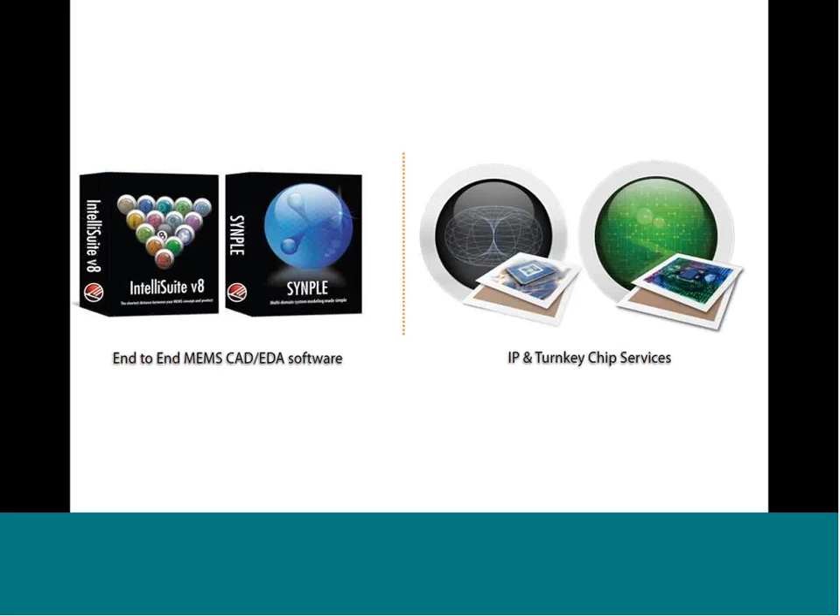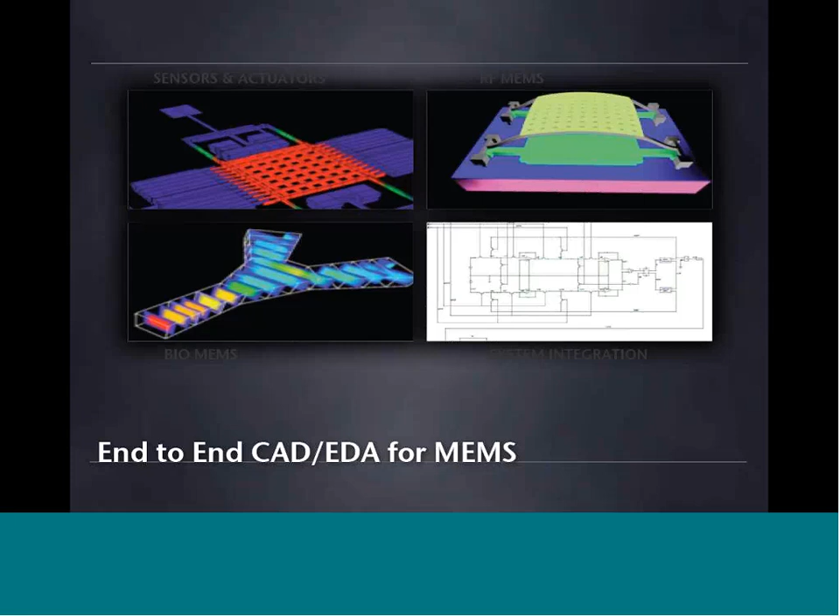So as I mentioned, we have the MEMS software and also the fabrication and design services. Within the software tools, we have a large suite called Intellisuite, and this suite includes anything from process simulation, which we're going to talk about today, to more system-level simulation, microfluidic simulation, thermo, electromechanical, multiphysics analysis, layout, and a few other tools as well.

As far as development of hardware devices ourselves, we've done a lot of work developing our own devices, as well as design and fabrication services for other customers, universities, and companies that we partner with.

Our operations are headquartered in Boston. That's where our main location is, and we also have a large facility in Nanjing, China, which currently includes about a 50,000 square foot R&D facility with a clean room. This is where we do a lot of work ourselves making sure our simulation tools are benchmarked and accurate.

We've really put a lot of effort into ensuring that the simulation tool, specifically the wet etch simulation tool, is the most accurate simulator possible.

Today we have customers in over 30 countries all around the world, from Europe to Asia to North America. Some of our customers include some of the largest companies around the world working on MEMS, as well as a large amount of academic partnerships.

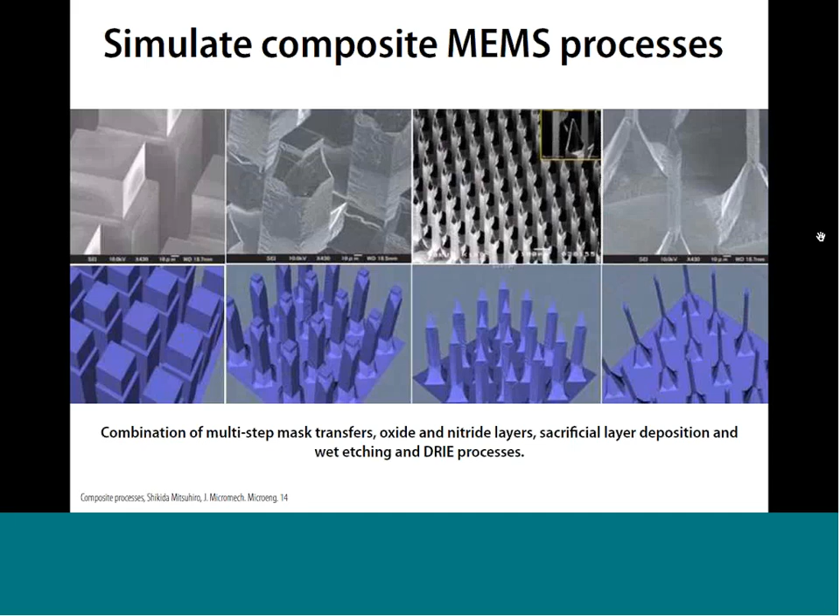As you see here, this is a comparison between actual microneedle array fabrication on top and some simulations within IntelliEtch on the bottom. This is a 4-step process with 4 different masks, having a separate etch between each mask step. So for simple etching simulations, as well as complex simulations like this with multiple steps and different combinations of processes, IntelliEtch is really powerful.

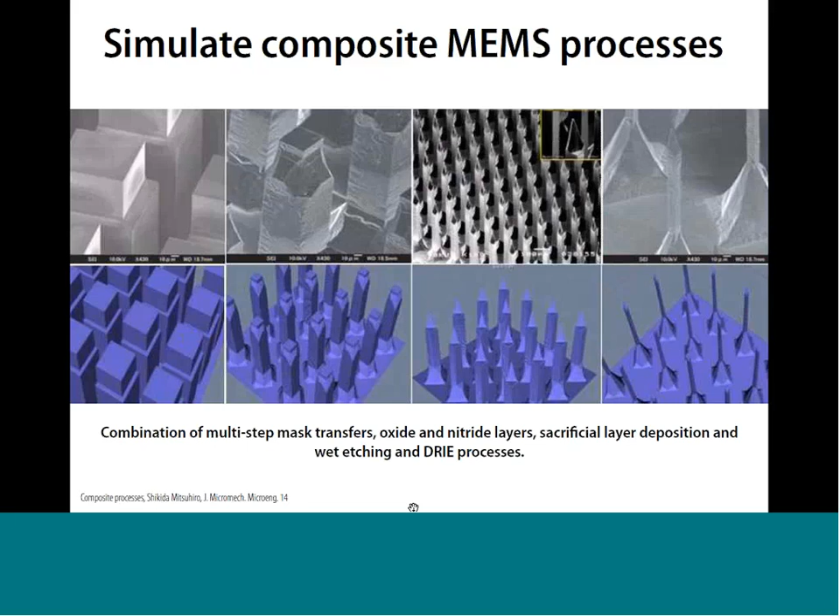As I mentioned, we've really validated the simulator, spent a lot of effort benchmarking it. You'll see here some of the different experiments that we've done to compare the simulation results to the results in our own clean room.

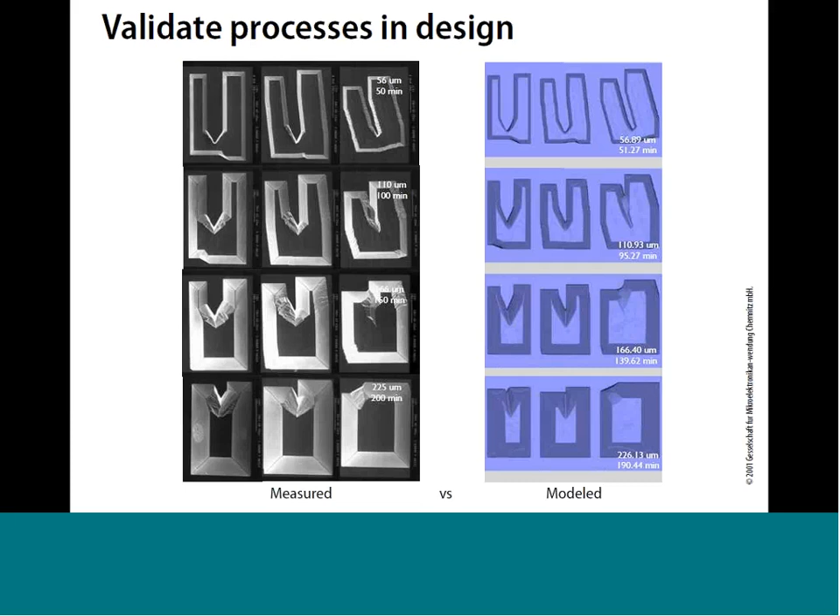One other advantage of IntelliEtch that really sets it apart from other tools is the capability to do higher order plane etching. So as opposed to simply being limited to some of the standard silicon wafer orientations, in IntelliEtch you really have the freedom to etch whatever higher order plane you'd like to, and this really opens up a lot of possibilities.

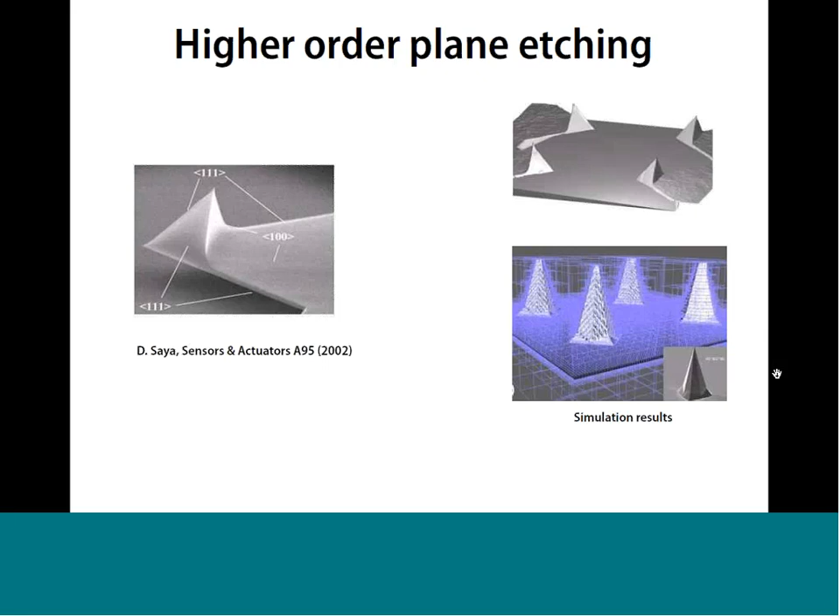Probably the best way for you guys to really get an idea of what IntelliEtch is about is for us to take a look at the software itself directly. So you'll see here I have the IntelliEtch program open. What I want to do now is just take you through a simple example of how to use the program, just so you get an idea of how the software is used and maybe get some ideas on how it could be helpful for you in your research and teaching.

So to start out, when we're using the program, we're going to be defining a certain silicon wafer. As I mentioned, we have these predefined surfaces here. So if you're using just a standard 100, 110, 111 wafer orientation, you can select those. Or if you want to do a more advanced surface and etch a higher order plane, you can simply input the orientation of the wafer using the Miller indices in these boxes here, the H, K, L Miller indices, and it'll generate a wafer of that orientation for you.

And we do have the capability to etch quartz as well. Most researchers are doing silicon etching, so that's mainly what the program is used for. But it is possible to do anisotropic etching on quartz, and we're also adding capabilities for other materials as well.

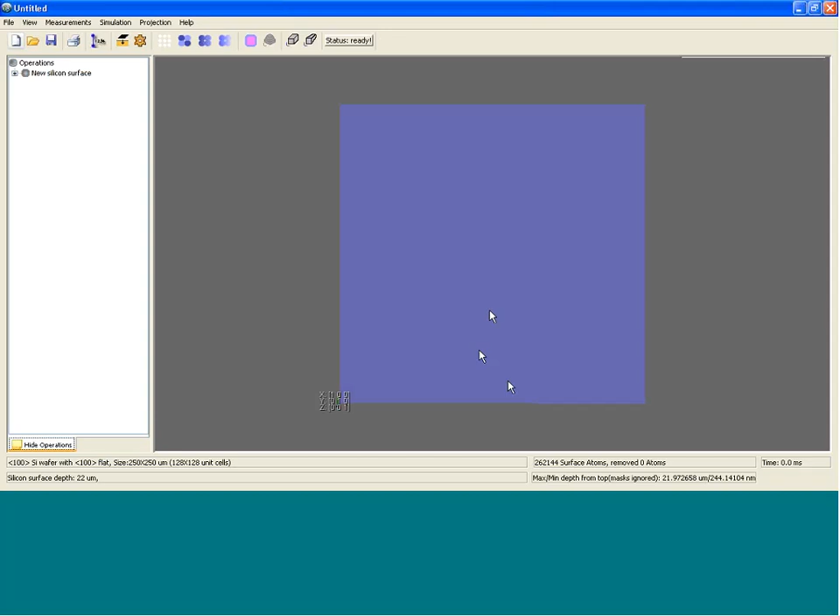So you'll see then that we have this wafer generated with our desired orientation. The next step is going to be to apply a mask onto the wafer before we do any etching on it. Now, the way that you would apply a mask in the program, the first step is that you would need to import your mask file from whatever layout program you're using, and import it so that you can use it within IntelliEtch.

So to show you how to do that, I'm just going to open up our layout editor for a few minutes. This is our layout editor called Blueprint. Blueprint is automatically included with IntelliEtch because it's needed in order to import the mask files from other programs. Or if you'd like, you can simply draw your mask layout within Blueprint here. But in many cases, people might be importing, say, a GDS file or a DXF file, and that's very easy to do. All you need to do is select your GDS file and open it up within Blueprint.

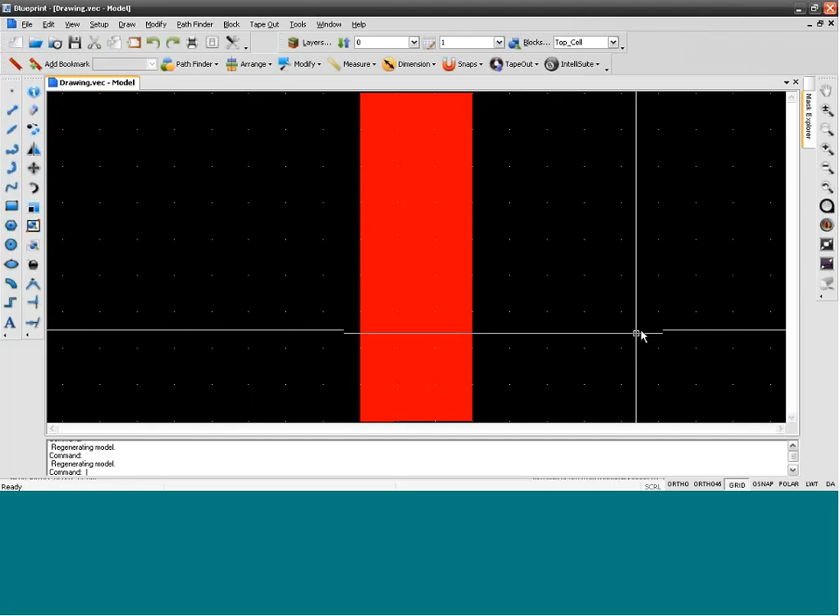So you'll see this is just a simple square mask layout. Once you open up your GDS file or your DXF file, in the case that you wanted to import it from another program like LEdit or AutoCAD or something, then all you need to do is export it into our IntelliSuite format.

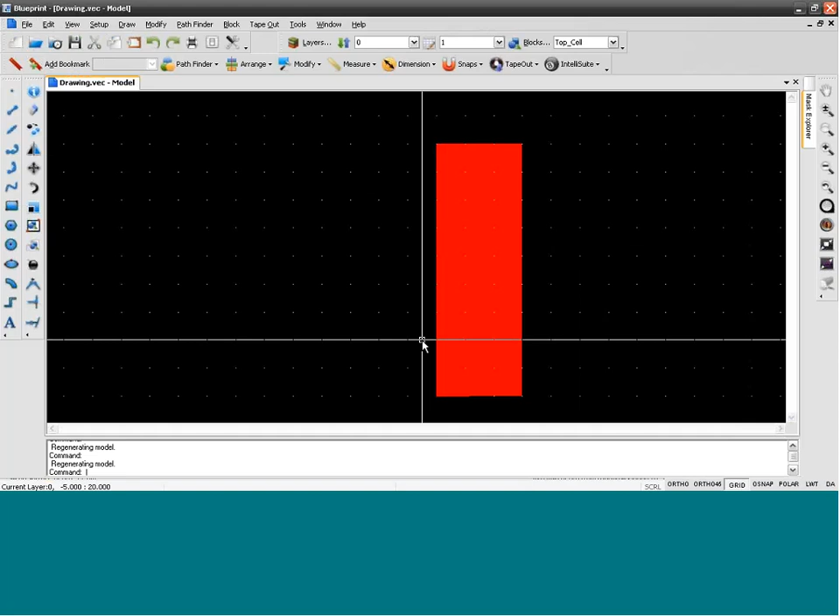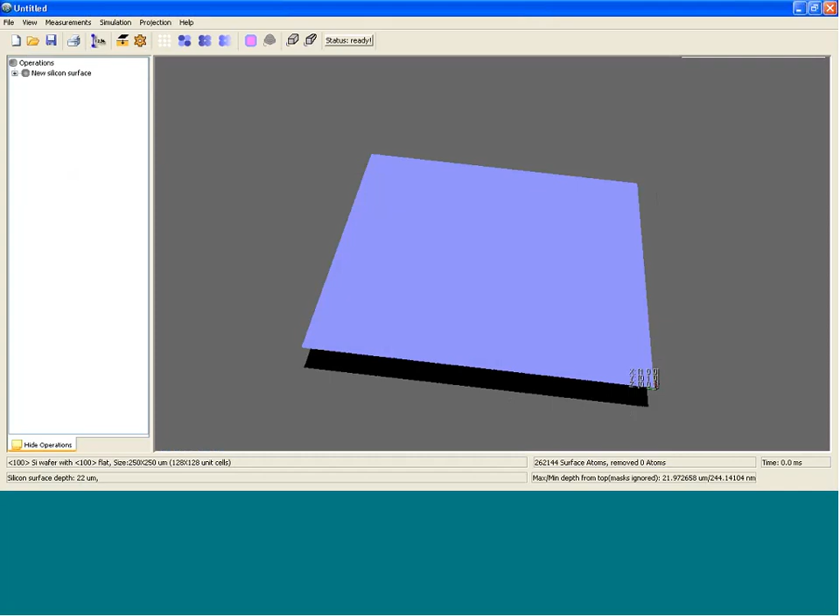Save that mask file, and then it'll be ready to use within IntelliEtch. So if we go back into IntelliEtch, once we have that mask file imported and saved in our IntelliSuite format, we can apply it on the wafer here. We would select the file that we want to use. In this case, we also have the possibility to use bitmap files as well. So we would select our mask file, and then we've got it ready to be applied on the wafer here.

Depending on if you want it to be a negative or a positive mask, you can flip that back and forth as far as exactly whether you want it to be negative or positive.

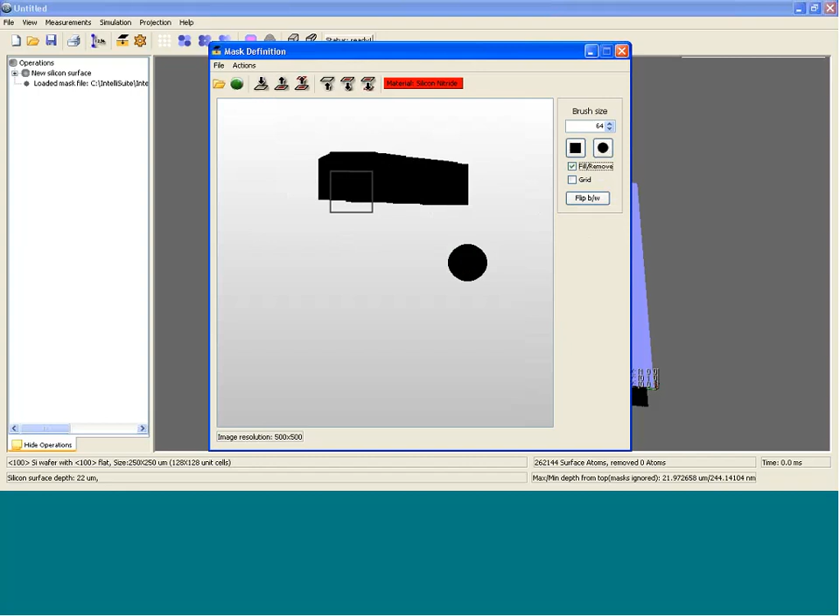If you really wanted to, you could actually use these drawing tools, and you could draw right within this mask window. So you could just draw some shapes quickly, different shapes, which is obviously a little bit less accurate. In most cases, you're probably just going to want to be importing your mask file. But we can just take that away as well.

And then you're going to be applying it on your wafer. Now we have two different options for applying the mask on the wafer. In this case, we're going to just keep it as being defined as silicon nitride. But you can choose between silicon nitride or silicon oxide as well. The materials don't really have any difference in the simulation—they're both going to be considered as just a hard mask.

So within the etching simulation, the actual mask material is not going to be etched away at all. It's just going to be considered a hard mask. But having the option to define the two different materials will allow us to apply different masks on top of each other, which we're going to do in just a minute, so you'll get a better idea of how that might work.

But in this case, we have our mask, so we're going to apply it on the top of the wafer. We're just going to click this button to apply it on the top of the wafer. So you'll see that little circle is going to be applied on the wafer, and you can see it in red there.

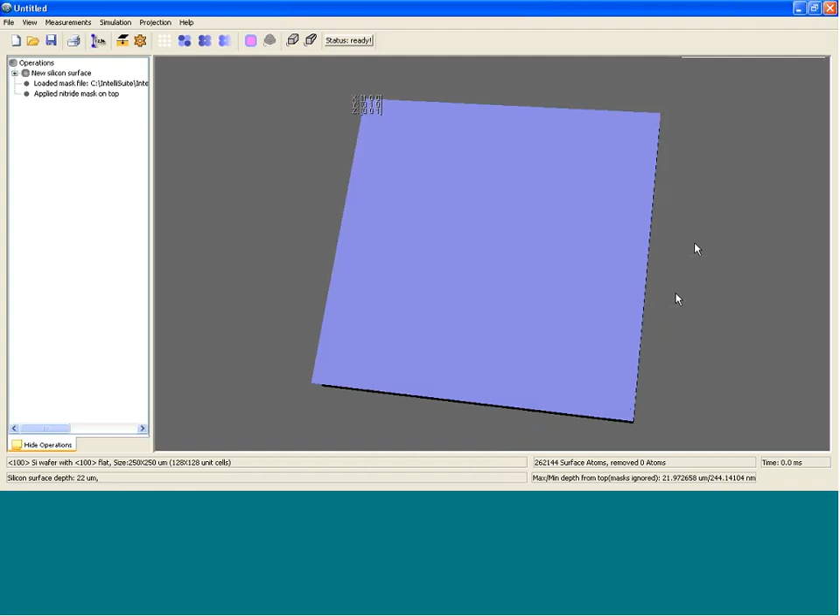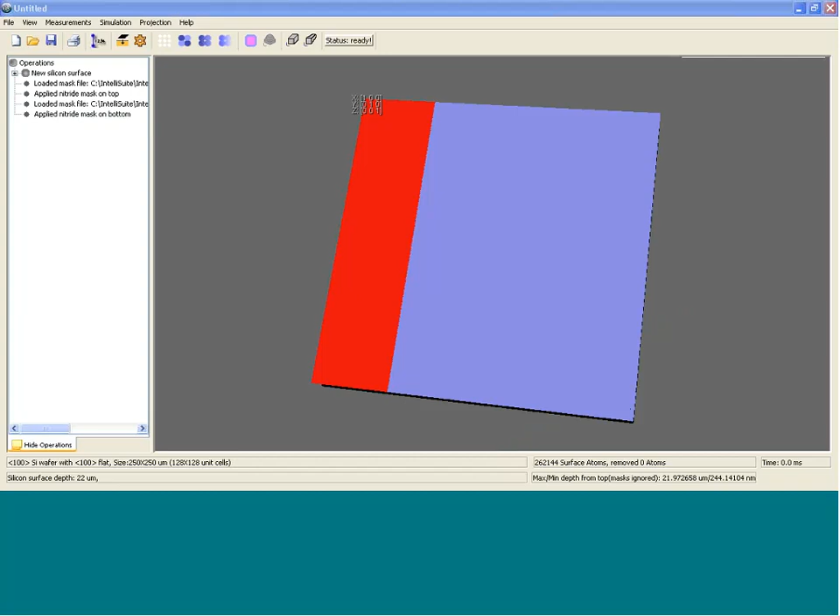What we're also going to do is apply some masks to the bottom of the wafer. So you'll see I can just flip this over so we can get a look at the bottom. And we're going to open up a different mask. You'll see we have this different mask shape, and we're going to select this button over here to apply the mask on the bottom. You'll see that it's going to be applied on the bottom there.

And finally, we're going to apply one more mask on the bottom, which is going to cover the whole bottom of the wafer. In this case, we're going to use the oxide material. So that's going to be applied on the bottom. But you'll see it's not going to be applied over the nitride material—it's only going to be applied on this bare silicon part of the material here.

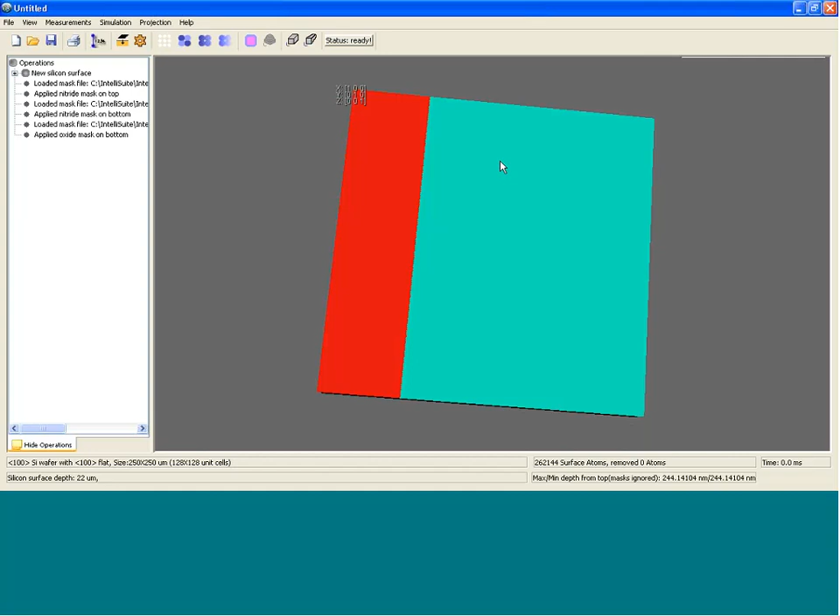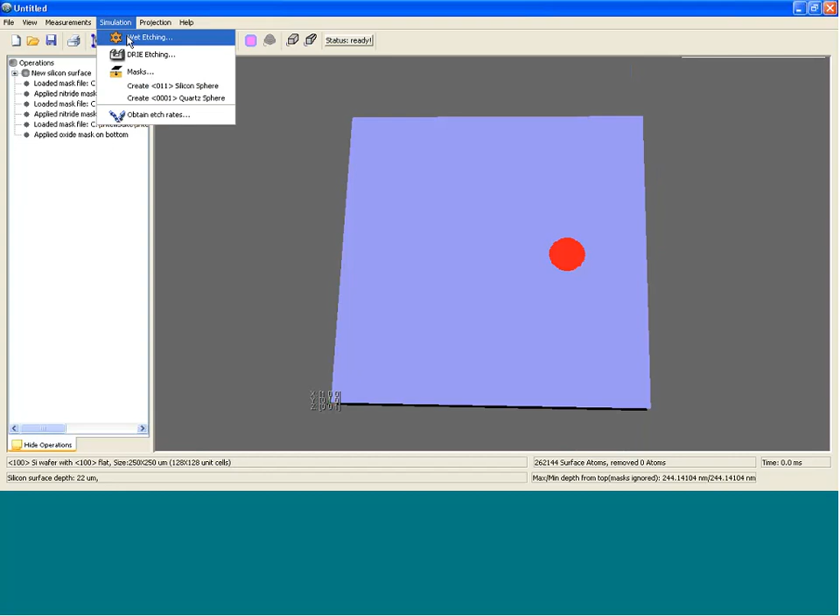So now that we have all of our masks applied on the wafer for right now, we're going to go ahead and start up the wet etching. To start up the wet etching process, we're just going to go ahead and open up this window here. Here we're going to select whether we want to etch the wafer by a certain time period, or we can also etch down and define a certain depth that we want to etch down to as well. In this case, we're just going to etch a certain time period, 17 minutes for this first step.

Here we're also going to put in our wet etch parameters for the recipe we're using. We have a database with some of the common recipes that might be used. In this case, we're going to use KOH, 40% concentration at 70 degrees Celsius.

We also have some different concentrations here, as well as different concentrations for TMAH, TMAH with a surfactant, or KOH. These are just some of the common recipes included here.

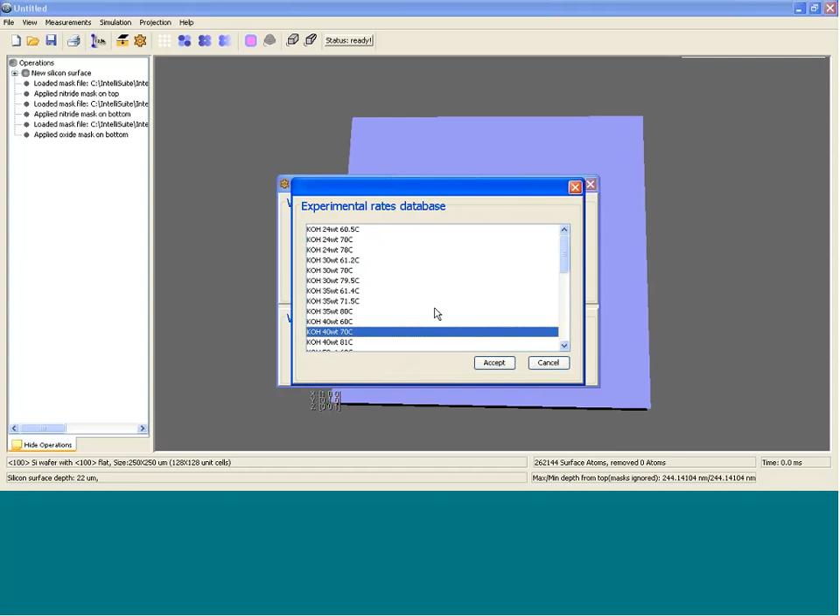If you're using a recipe that's different from one of the ones listed here, it's also possible to calibrate your recipe and add it into the software as well. That's something that's easy to do.

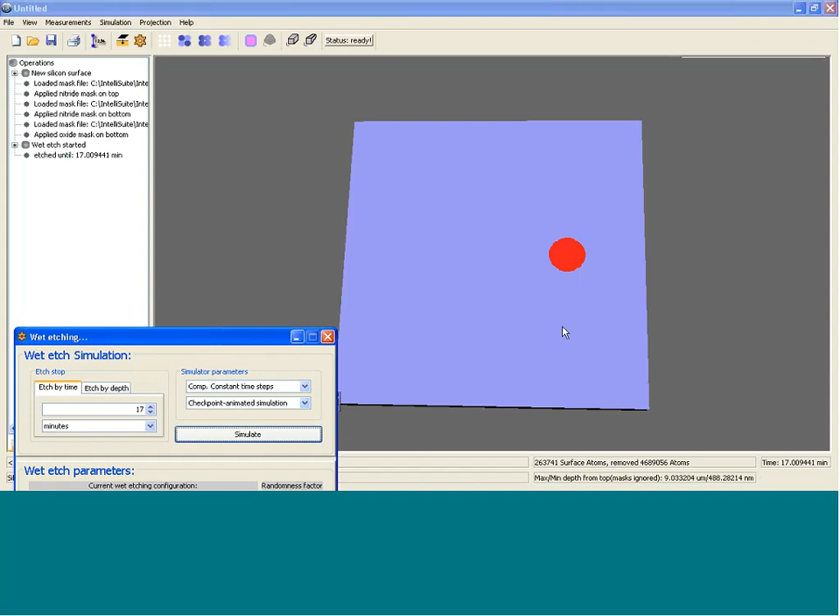So then we're just going to go ahead and start simulating. You might be able to see the software moving as we run the simulation. It ran through very quickly, and you'll see here that after we've done the etch, we just have this little tip underneath that circular mask shape.

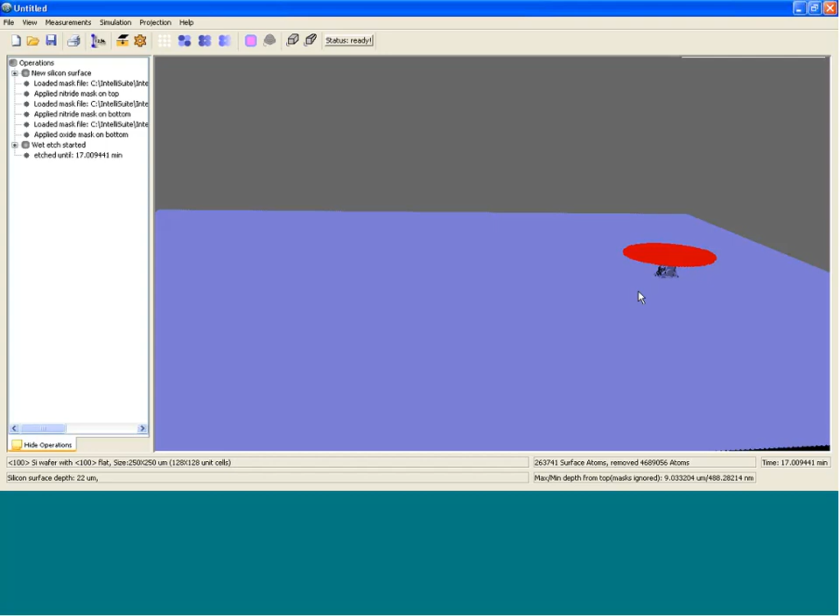Now what we're going to be doing in the end is creating an AFM tip, in this example, and a cantilever for an atomic force microscope. That's the structure we're going to be creating out of this wafer. This tiny little tip here is just the end of that cantilever tip, which is going to be used with the atomic force microscope.

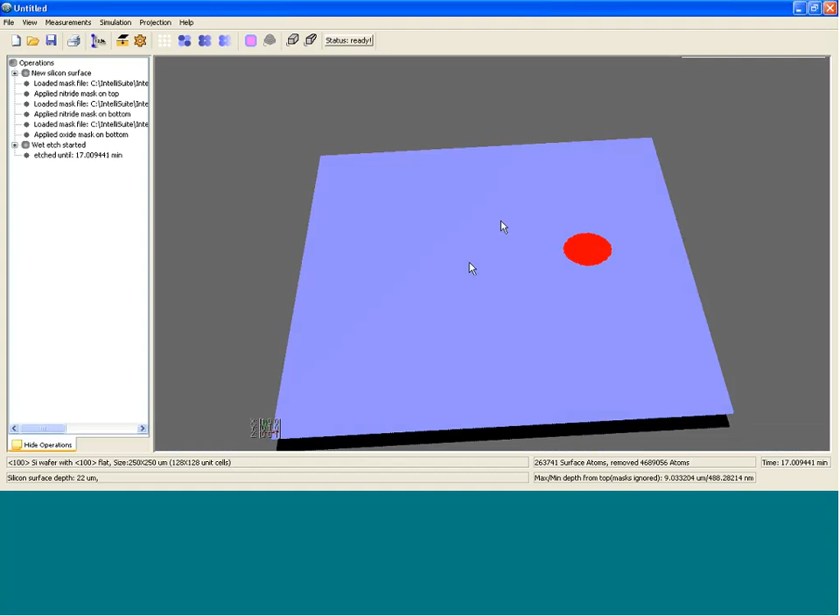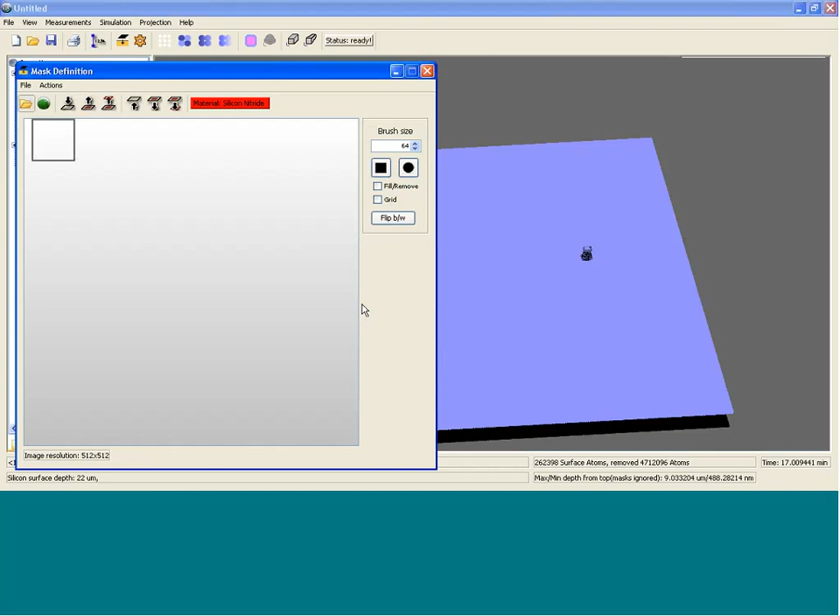So now the next step is we're going to be applying a different mask. If we go back to our masks menu, I'll drag it over to the side so you can see the wafer as well. We're going to remove this mask that we have on top right now, so we'll see that mask gets removed, and we're going to go ahead and select a different mask and apply that on top instead.

You'll see this new mask is applied here, including on top of this feature that we created. That's a bit of what I was talking about in having this tool be very useful for multiple step etching processes with multiple different masks. This functionality makes it easy to simulate a lot of complex devices that can be produced by wet etching.

So if I go back into our wet etching menu, we're just going to continue the etch we're doing. In this case, we want to use the same recipe, and we're going to be etching this structure for 11 more minutes. We've already etched it for 17 minutes, so we're going to put in 28 minutes as the total time we want it to be etched, and we'll go ahead and simulate that.

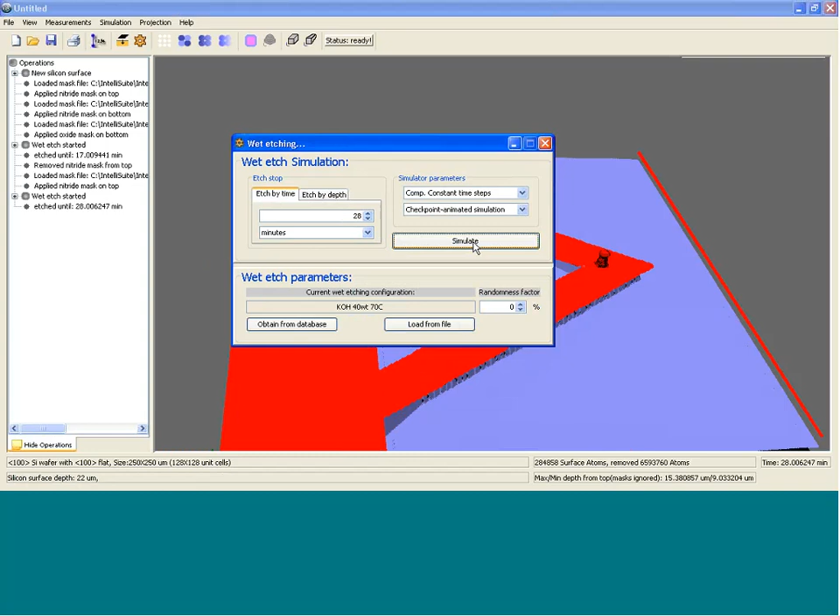So you can see if we look at the wafer here that we've done some more etching that's being protected by this mask, and we've still got those masks on the bottom layer, so nothing's happening on the bottom layer yet.

You can also see here that the different operations we're doing are showing up in the operations window on the left. This shows us that we're applying our different masks, and we can look at which mask files we're defining. We've also got a record of what etch recipe we're using and how long we're etching it for.

Now, one thing that's an option sometimes is the question comes up: can we go back to what we had before, say go back to where we etched before we etched in this step? That's not something we can do directly in this structure that we're working with.

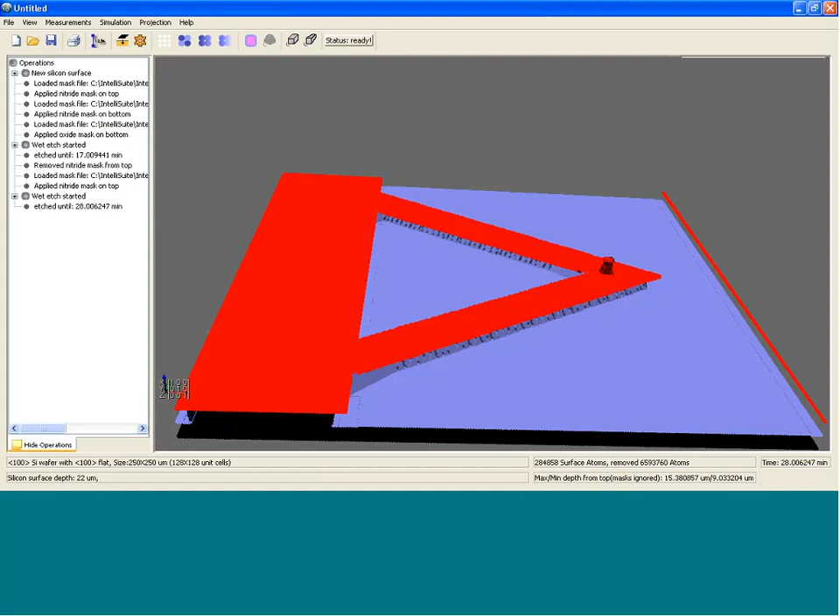But one thing that's easy to do is we could save the simulation at the current point that we're at right now. So we could save the simulation and freeze it right here, and then maybe go on and do some additional etching steps. If we wanted to come back to the point we're at right now, we just have to open up that simulation file that we saved.

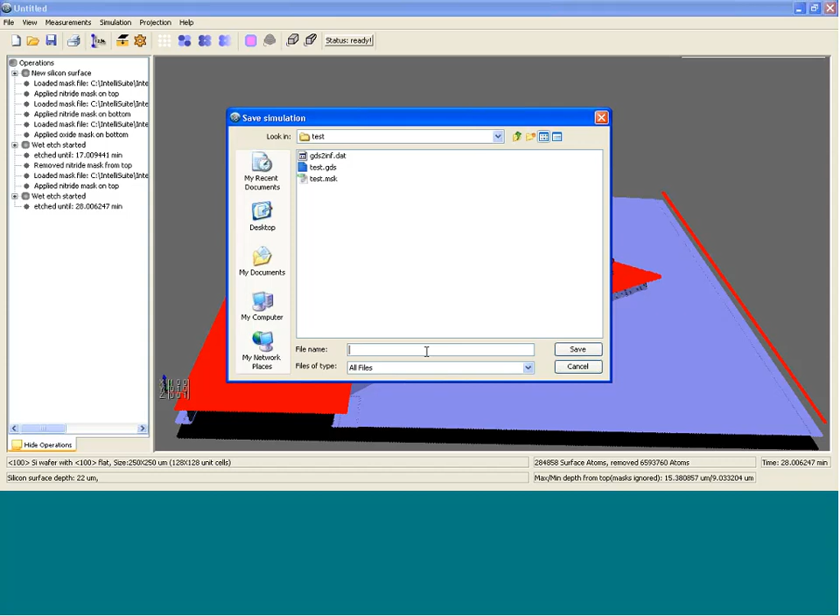So say maybe we want to go ahead and just save that simulation. We can save the simulation right here and come back to it.

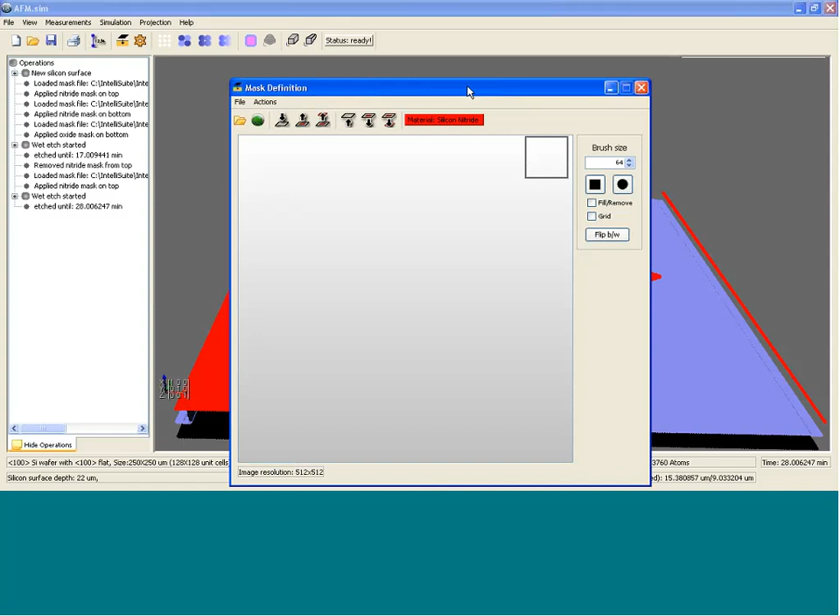In this case, we're going to move forward and continue to change the masks up a little bit and continue doing some wet etching. So the next step is we're going to go ahead, on the bottom side, and remove this green oxide part that we have.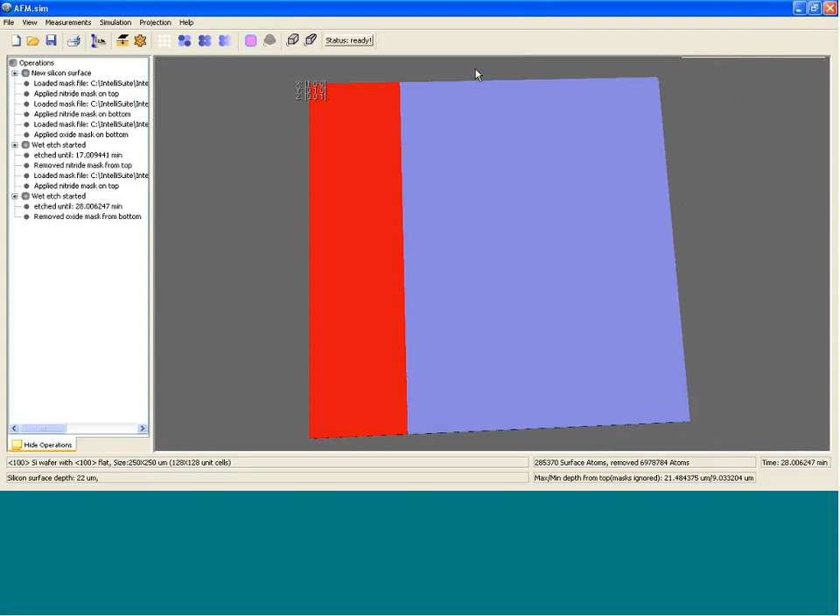We're going to click over to the oxide and say that we want to remove that from the bottom layer. Anything you see the color blue here is now just the unprotected silicon wafer, which we can go ahead and do some more etching on.

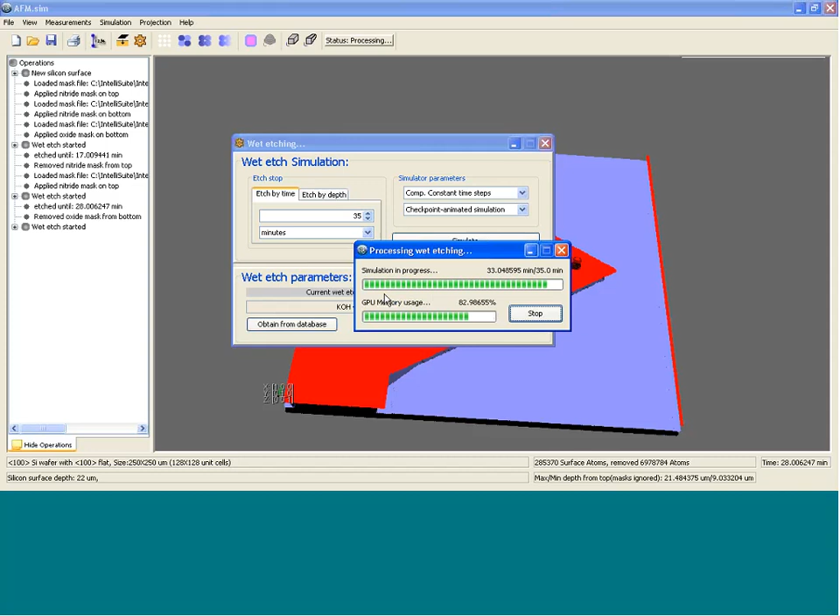So now we're going to go back into our wet etching window and etch for an additional 7 more minutes. Go ahead and simulate that as well. You can see the simulation progressing there in the progress bar, and you would also see the GPU memory bar. One advantage of IntelliEtch here is that we can access the GPU memory within the computer's graphics card, which allows the simulations to run through so quickly, as you're seeing here.

So one thing that you're going to need in order to run this version of IntelliEtch, this GPU version that's going to access the GPU memory, is you'll just need to make sure that you have a CUDA-enabled graphics card from NVIDIA. And if you had specific questions on those graphics cards, feel free to email us, and we could give you more information on exactly which graphics cards will give you the best performance.

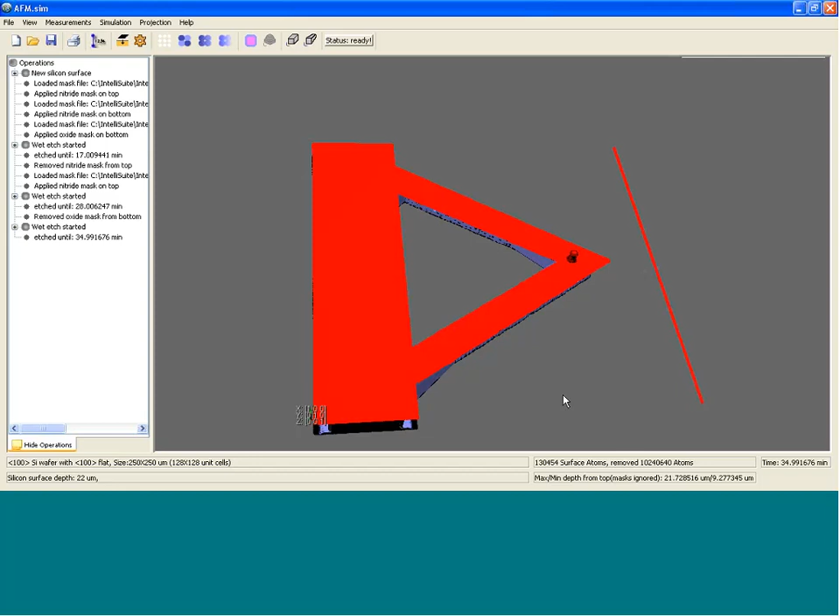So now you'll see it etched away to provide us with our final structure here. What we can do right now is just go ahead and remove the masks so that we can see the structure, on the top and on the bottom. You'll see that what gets created through those 3 steps is this atomic force microscope tip, as I mentioned, so this AFM cantilever tip.

With just this tip on the end of the cantilever structure right here. And so once we have our final structure created here, we can do a couple different things to look at it. One thing that we can do is we can take some measurements of the structure.

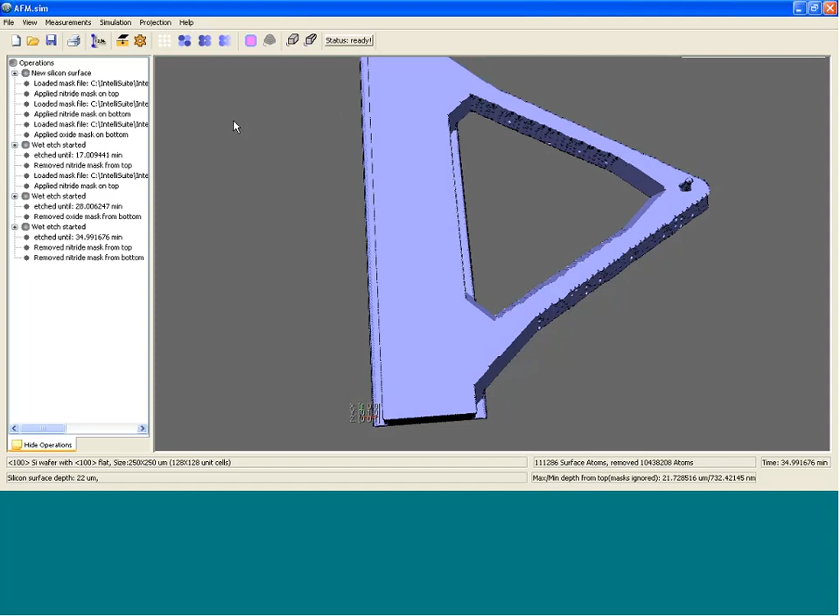Say if we wanted to use this measurement tool and measure the distance between 2 points. Say if we wanted to measure the length of this cantilever tip from the base here, we can measure that, and you'll see it gives us the measurement here.

We can measure exactly just one certain point and give us the coordinates of what that one point is on the structure. And we can also say, if we want to look at the orientation of one of the planes that we've etched here,

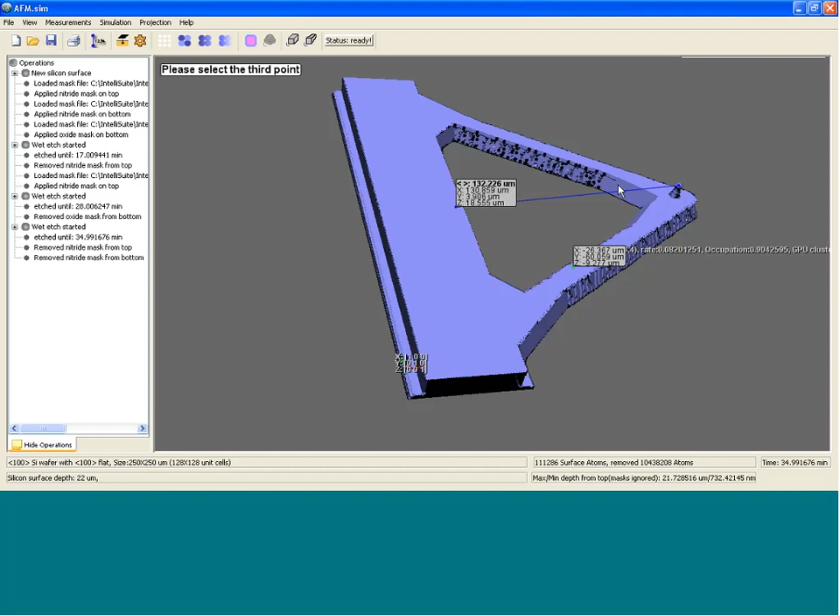we can just go ahead and say if I wanted to look at this plane and determine what orientation it was, we'll see that this plane that's etched here is this -1, -1, 1 orientation. So that's a useful way, when you're etching a structure, to look at which planes you have.

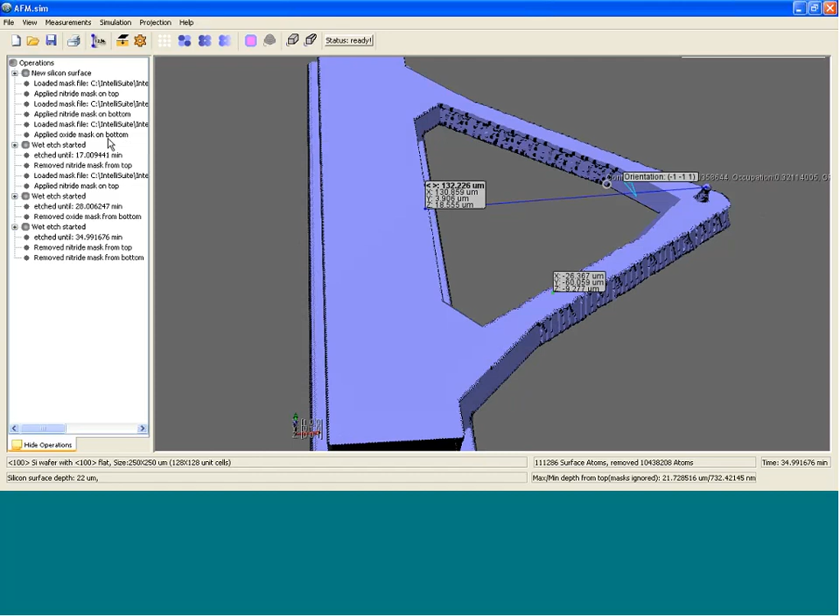So those are some different things that you can do with measuring the distances, as well as, say, measuring the angle between 2 planes is something that you can do as well.

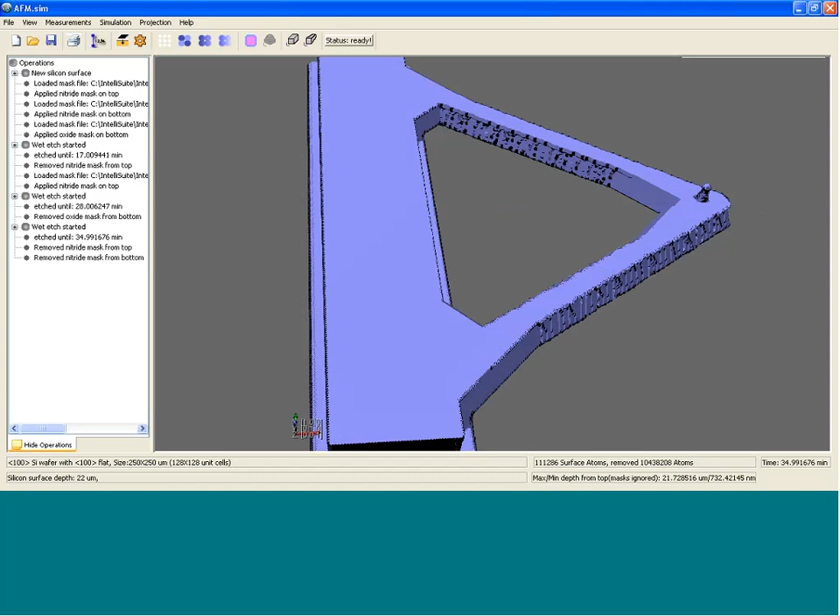So say we want to look at a cross-section of the structure, which is useful a lot of the times when we have a complex structure and can't really see what's going on inside of it. We can go ahead and look at a cross-section.

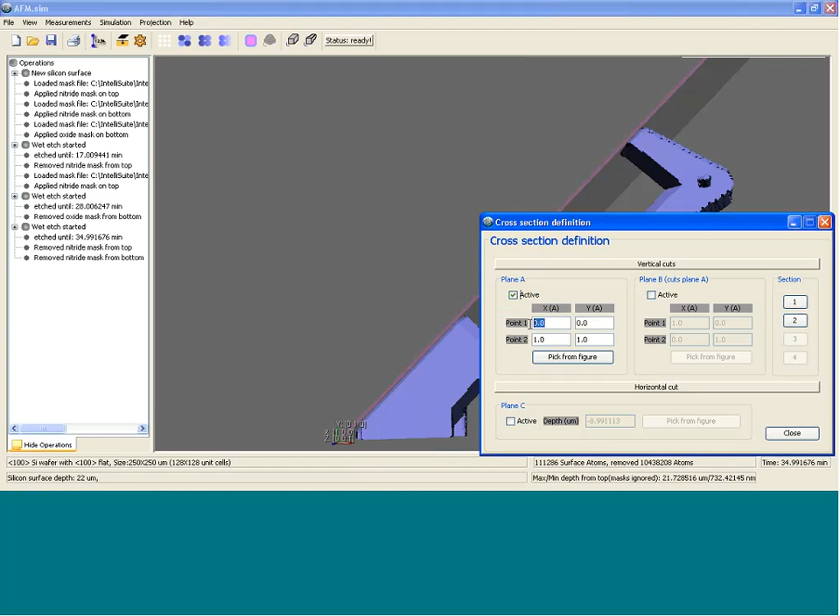And to do that, we simply open up this cross-section menu. We can say that if we know the certain coordinates that we want the cross-section plane to run across, we can input those in here. Or we can simply select 2 points on the figure that we want this cross-section plane.

So say if we want to just look at a cross-section right across the middle here, I can just select the first point on one side and the second point on the structure that I want to look at, and it'll generate the cross-section plane right around that point.

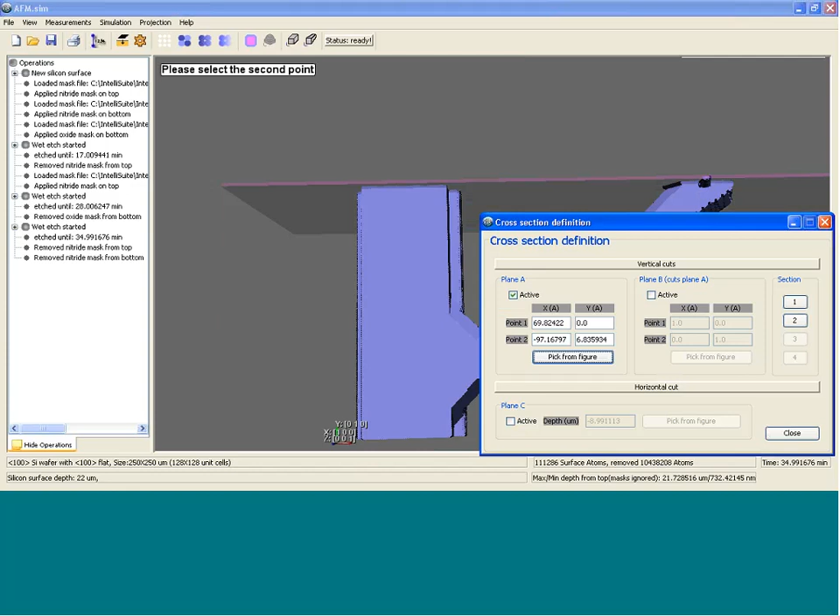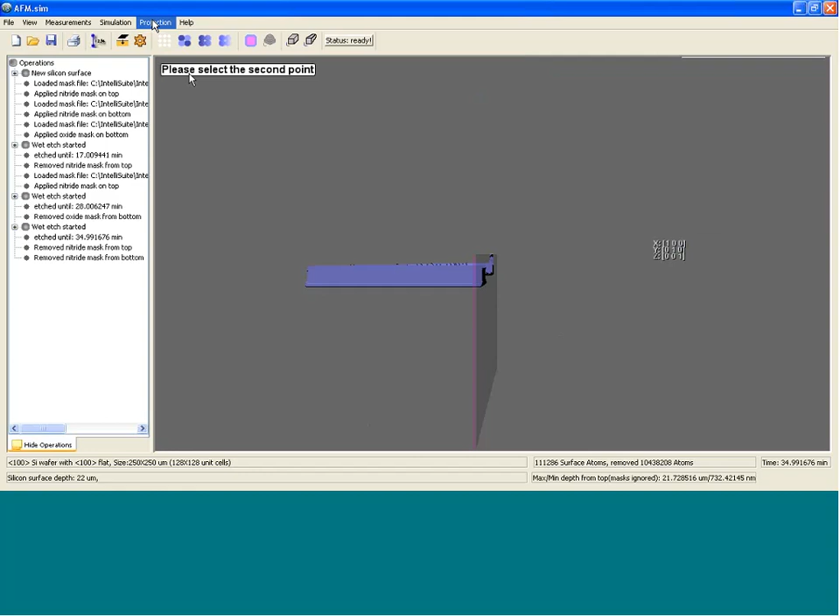Say if we want to flip it around and look at this side of the structure, then maybe what we'll want to do is potentially look at the view just from one side. So you see that's something we can do easily here.

Say if we wanted to measure the height of this cross-section tip, we would just look at this view from Y, is what I selected. And then we can go ahead and use our measurement tool, select the 2 points, and look at the height of that cantilever there, of that cantilever tip.

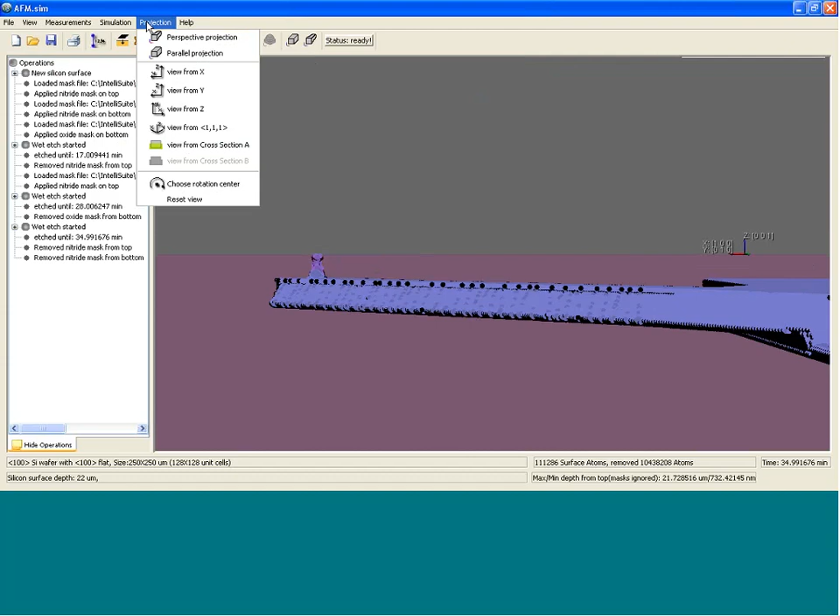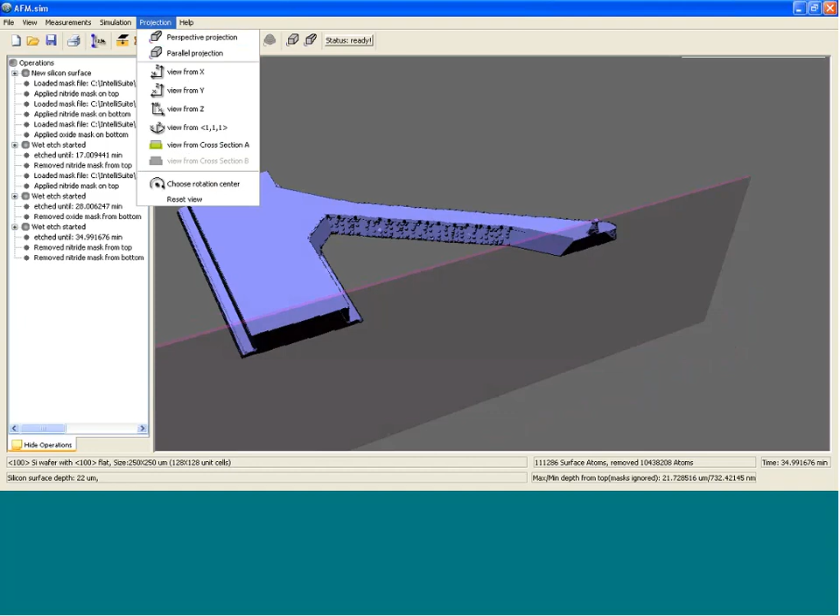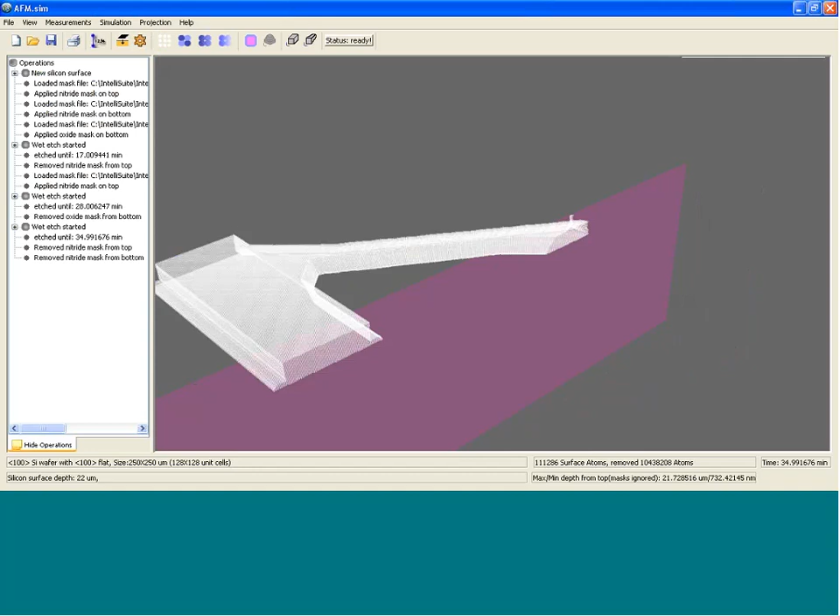Or in this case, we're looking at the opposite side of that cross-section that was defined. So as I mentioned, those were a few different options for the projection of the structure, which you can use to view it. There's a couple different views we can use. Another thing, going back to the view, there's a few different options for viewing the structure, as far as just looking at the structure as the individual cells we're using, or as a more smoothly shaded structure like we were looking at, just depending on how we want to look at it.

And then, one thing we can also do is export an image file. We can export a JPEG file of this structure here.

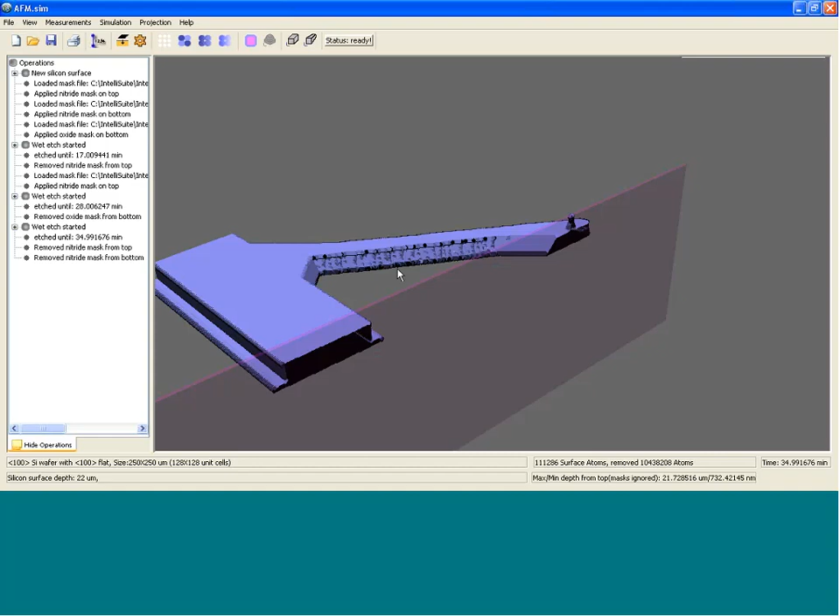As far as the export, it is technically possible to export this structure to a mesh, to a finite element mesh, but due to the fact that there will be so many small etched features, it's not really feasible to export this to a mesh and then go ahead and do multiphysics analysis on it.

If you wanted to export things to meshes, it'd probably be a better idea to use our other tool called IntelliFab, which is going to be the topic of a webinar next month, where we'll talk more about it. Within IntelliFab, it's a lot easier to do MEMS process simulation, and in this case wet etching is just one step of that simulation. But that tool makes it a lot easier to export a mesh for analysis.

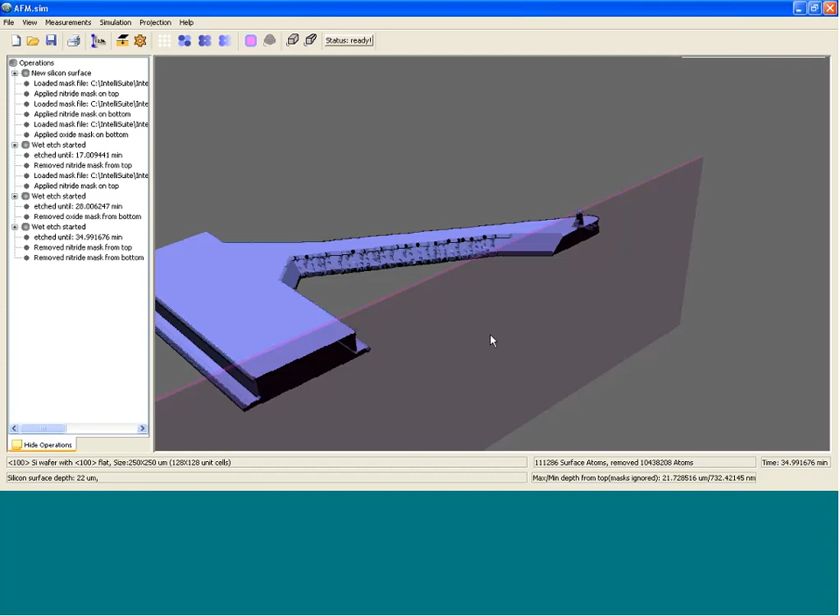Here within this tool, IntelliEtch is really for people focused on wet etching who want to look at how different mask layouts affect their final geometry, different mask designs, and also how different etchants and recipes, as far as temperature, concentration, etching time, and all those process parameters, are going to affect the final structure, as opposed to going into the clean room and running several experiments to test all those different iterations. You'll see that within the software it's a lot easier to simply import a mask, build up the recipe, and run through many different simulations and design possibilities quickly.

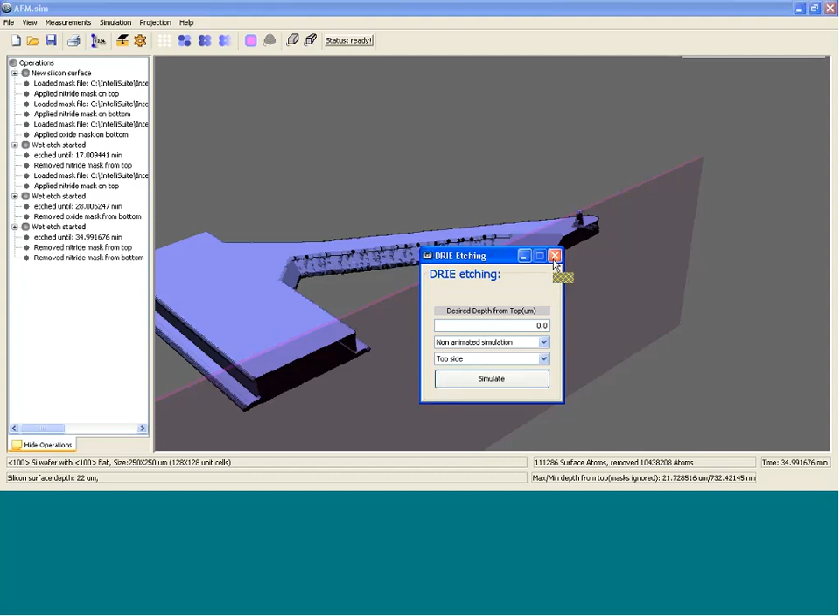And you may have also seen this DRIE etching option. This is not going to be the full DRIE simulation within this module. We do have other tools for dry etching as well, simulating dry etching of silicon. But in this case, in IntelliEtch, it's more of an approximation. It's really just going to etch directly down to a certain depth, and you're just going to have perfectly vertical sidewalls. So you're not going to see all the dry etching effects, such as sidewall scalloping or the etch lag that comes along with DRIE.

For that kind of thing, we have other tools, as I mentioned. Recipe is our main dry etching tool, as well as the IntelliFab and FabSim tools. But here within IntelliEtch, we included it just to have a nice approximation if you want to combine a simple vertical etch like that with your wet etch steps as well.

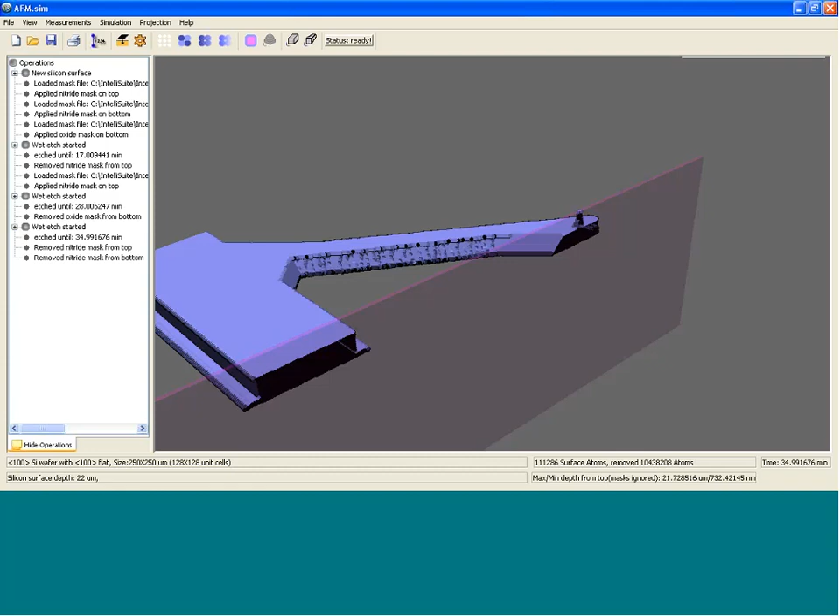So that's a little bit of an overview of this example here within IntelliEtch. As you'll remember, we took things through the initial setup and import of the mask, all the way through defining the wafer orientation and wafer size, then applying different masks on the structure, on the top and bottom of the wafer, and using different material definitions to apply multiple masks at once. And then you saw how we can do multi-step etches with multiple different masks.

And then, after the simulation was completed, looking at different post-processing elements as far as measurements and cross-sections, and some of the different ways you can look at the results and the geometry, and some of the different exposed planes and other things like that.